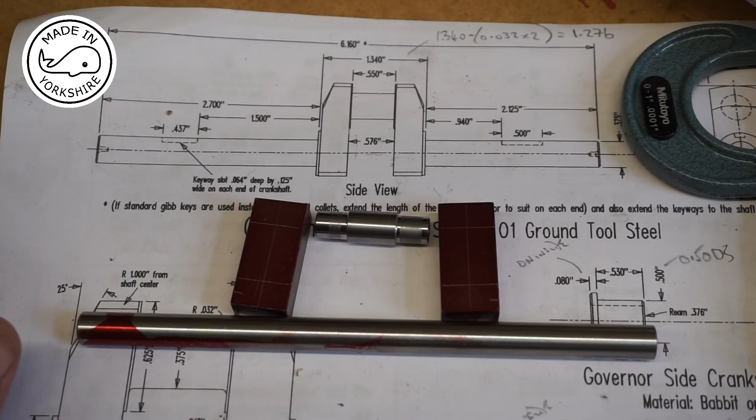Now in this video I'm going to be machining the crankshaft for the Farm Boy hit and miss engine. Okay, so the drawing shows the crankshaft being made out of one piece of tool steel. Now I've not a cat in hell's chance of making this out of one piece of metal, so what I'm going to do is fabricate it. I've got some silver steel rod here, which I think is the same as tool steel. This is 3/8 of an inch in diameter. So I'll show you what my plan is.

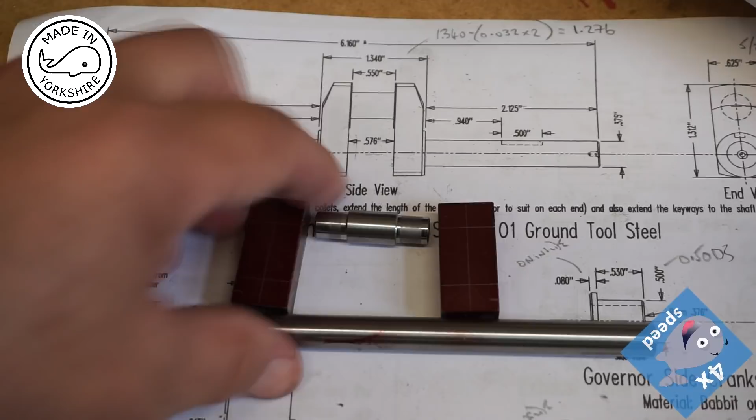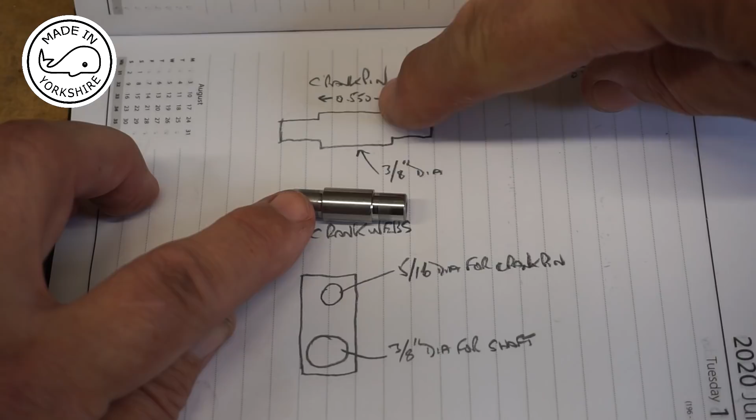For the crank web, I've already partially machined this, and what I've decided to do is to turn the sides down to 5/16 of an inch and leave the centre a width of 0.550 of an inch. So that actually means that when I assemble this, I can push these crank webs up to that point, and I'll be damn certain that the distance there is

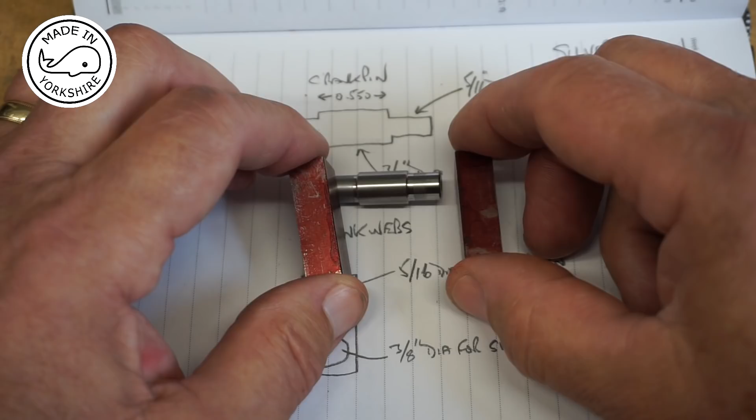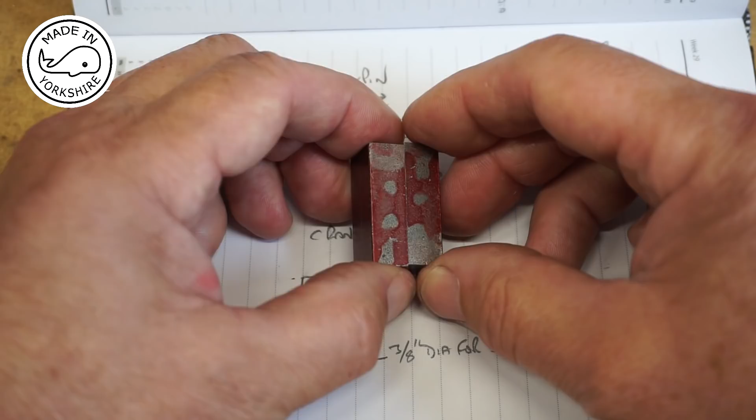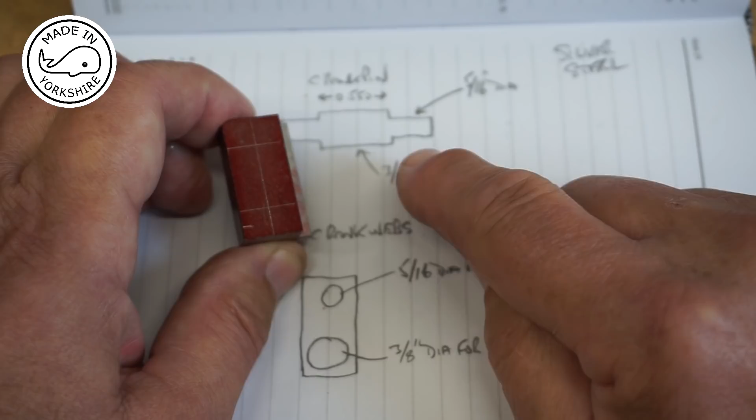0.550 of an inch. If I left these outside edges the same diameter as 3/8 of an inch, then on assembly it might be a bit more difficult. So that's my plan. With the crank webs, I'm going to Loctite these together, I think. The top hole, which I've marked, will be drilled and reamed to 5/16 of an inch, and the bottom one will be drilled and reamed to 3/8 of an inch. I think I'm going to do that on the milling machine, so I'll get it set up, and then I'll get back to you.

Okay, so I've already used an edge finder to find position, and I've used a centre drill, and that confirms that my original scribe lines were in fact correct. From now on, rather than use a normal chuck, I'm going to use an R8 collet chuck to give me more accuracy. This is a 6mm drill bit in there at the moment, and just to demonstrate how accurate that is, the gauge is just fluctuating around about 1 thou, so it's only 1 thou out, which is pretty good for a little machine like this.

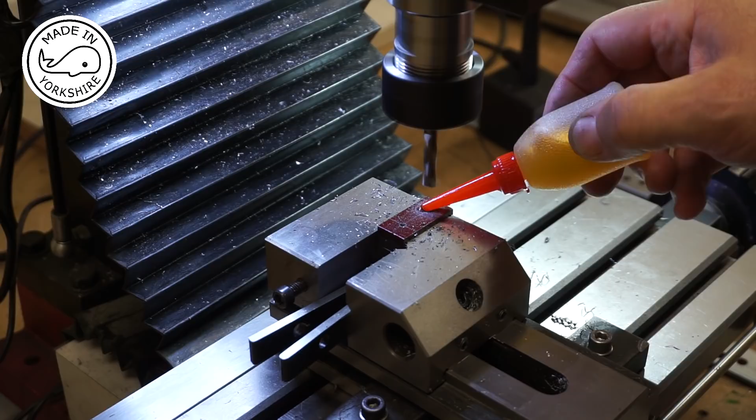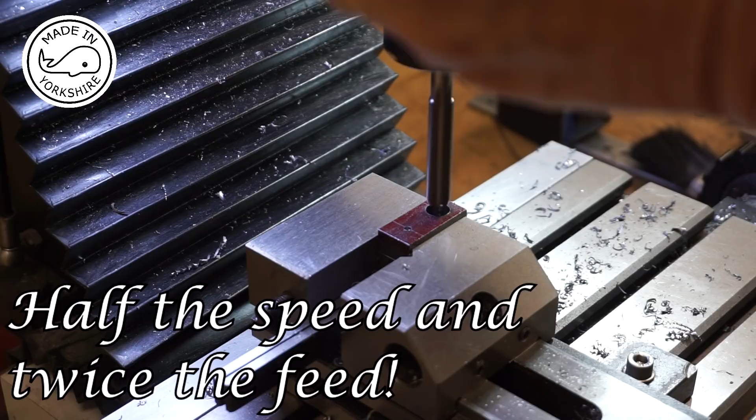So first of all I'll drill through with a 6mm drill bit, and on this one I'm going to drill to 23/64, and then ream to 3/8 of an inch. I've actually moved the reamer quite high up in this collet chuck to make it more accurate. Okay, so I need to repeat the same process for this other hole, but I'll open that up to 5/16 of an inch, and I'll do all that off camera. Well, that seems to have worked out okay.

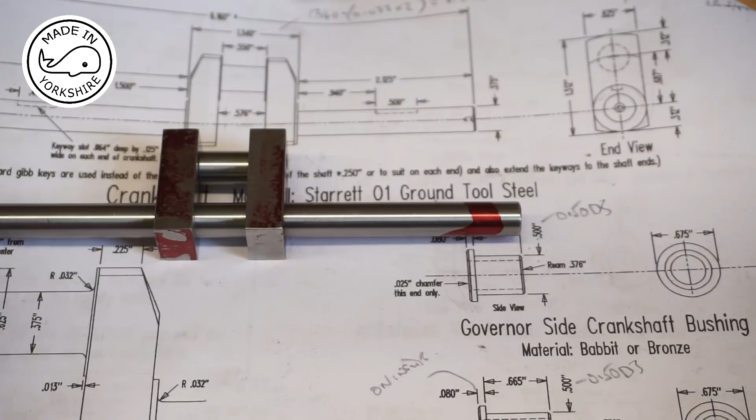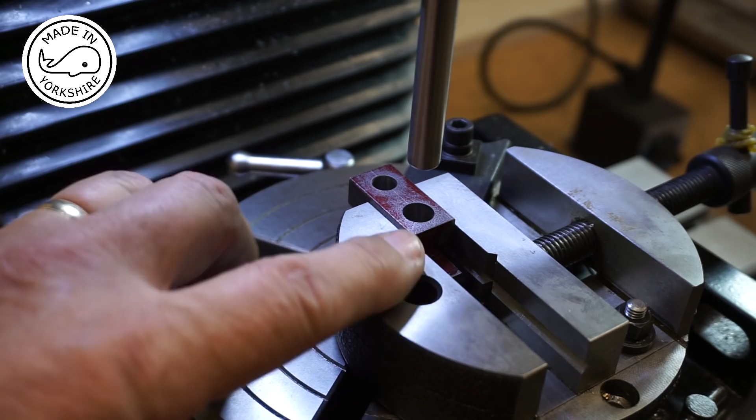What I need to do now with these crank webs is to create a boss there, and also put a radius on each end. To do that, I'll set up the rotary table on the milling machine. I've centred the table and put the piece in this little vise. This is a piece of rod 3/8 of an inch in diameter; I moved the rod into the hole, centred the vise, bolted it down, and now I know that this hole is spot on centre, on the same centre as the

rotary table. So to create this boss I need to put a cutter in here, position the edge just at the bottom, and take off 30-odd thou.

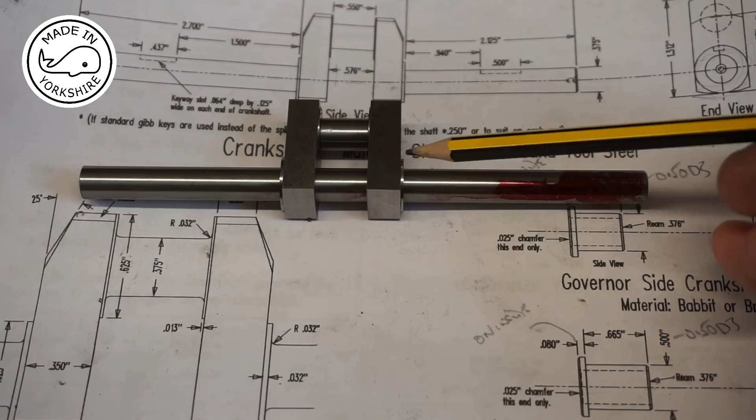Well, the crank webs certainly turned out okay by the looks of it. And I did realise when I looked at the drawing in some detail that there's a little boss on the inside there that needed to be machined. It's only 13 thou, but I did that in exactly the same way as I did the outside ones. So what I need to do now before I glue it all together is I need to cut these keyways. So I'll mark them up and then I'll go over to the mill and have a go at cutting them.

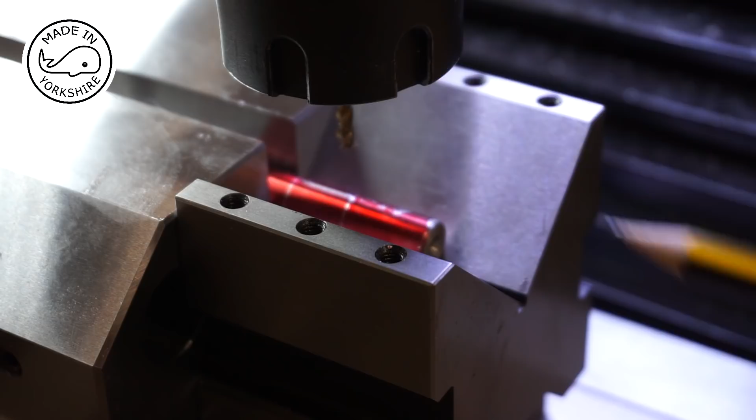Okay, so I've marked up the keyways and I've placed the shaft on these V-blocks between this Type 2 vise from Arc Euro Trade. This is a 90mm wide vise, which is a bit large for this milling machine, but it works out fine for this application.

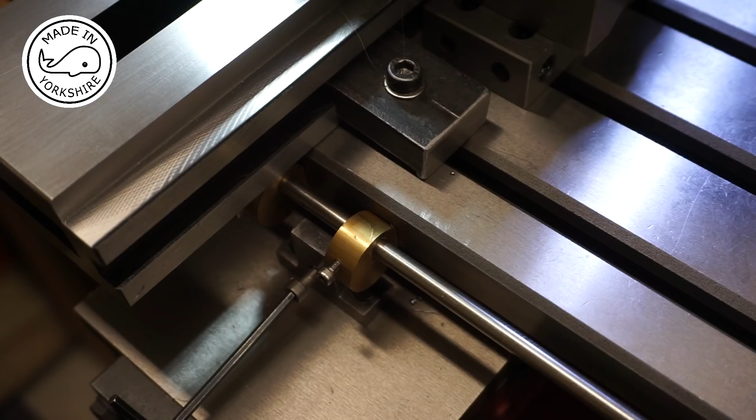Now, a while ago I made some limiters for the x-axis, and I don't know whether you can see it, but there's one in there and obviously one here, and they're limited in terms of the travel, so they're adjustable. You can move them wherever you want really, and I've set them so I can just go between the two stops, and that's exactly set where my marks are.

So rather than having to look at the DRO every time to see if I've come far enough down on the x-axis, I don't need to do that. I can just keep on going between these limits, and all I need to do is to start cutting at a depth of 1/1000 of an inch until I get to 64 thou. So that's the plan.

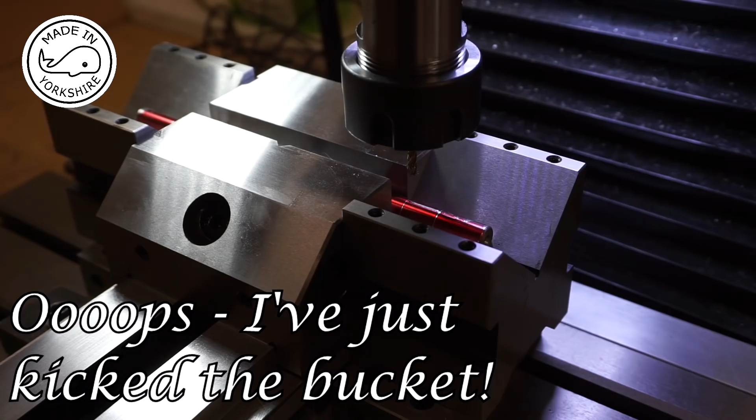Oops. There you go, I've broke the cutter. It just goes to show that 1/1000 at a time is too much for a little 3mm diameter cutter. Okay, so in hindsight I should have probably plunge cut with that 3mm end mill. But anyway, you live and learn. Now I've not got another 3mm end mill, so I'm going to have to send off for some.

So what I'm going to do now is I'm just going to use this 3mm, in fact it's 1/8 of an inch drill. So I'll drill to a depth of around about 64 thou, and then I'll move down a bit and repeat and carry on like that for the moment.

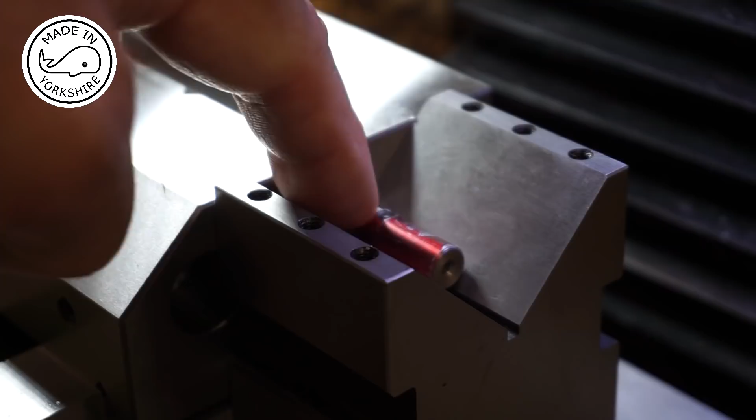Well, I'm certainly not happy with that. The drill bit wandered off slightly. So what I'm going to do is wait until I get another 3mm end mill, and when that arrives I'll use downward cuts instead of side cuts. Okay, so I had a bit of a rethink and I decided to use a little centre drill. So I've gone down the line with that. So when that 3mm end mill arrives, I should be able to tidy that up. So I'll repeat the same process on the other side, but I'll do it all off camera.

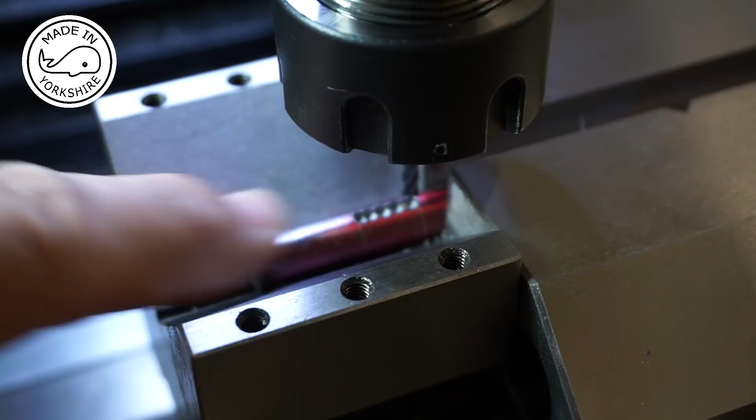Now, even though I've already centre drilled, I'm going to start off plunge cutting. Well, that looks pretty good. So what I'm going to do now is I'm going to cut sideways 1/1000 at a time until I get to that depth of 64 thou. But I'll do all that off camera.

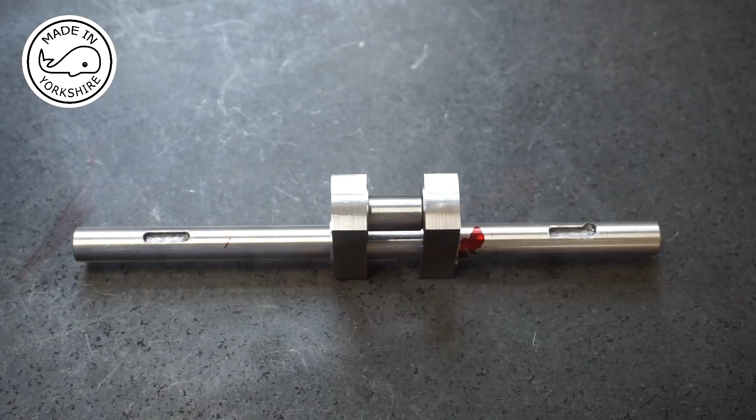Well, I never thought that milling a couple of slots would be so time consuming, but I got there in the end. Shame about that little mishap there, but never mind, it'll be under the flywheel.

So what I need to do now is, well, I've marked this end here, so I'm going to take it apart, then I'm going to use some Loctite 638, reassemble it again, and I'll have to do all that off camera because it's quite fiddly, and then I'll get back to you.

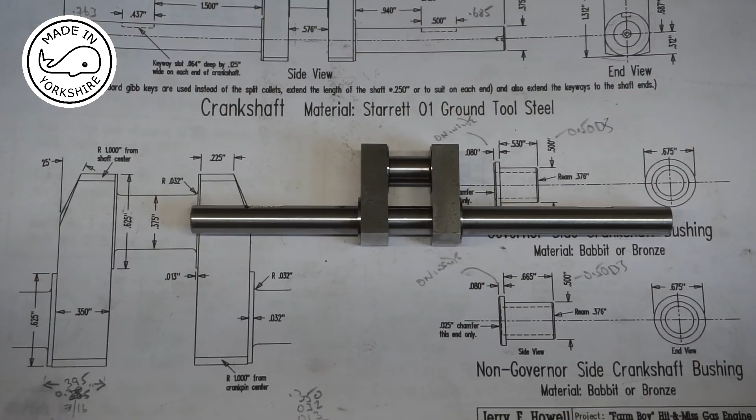Well, I could absolutely kick myself. When I assembled it, I didn't get the keyways exactly on the centre line of the crank webs. And I now realise that these keyways should have been machined after assembly, because I could have put that in the vise and then machined exactly in line. And I think with them being out, it could introduce some problems later on.

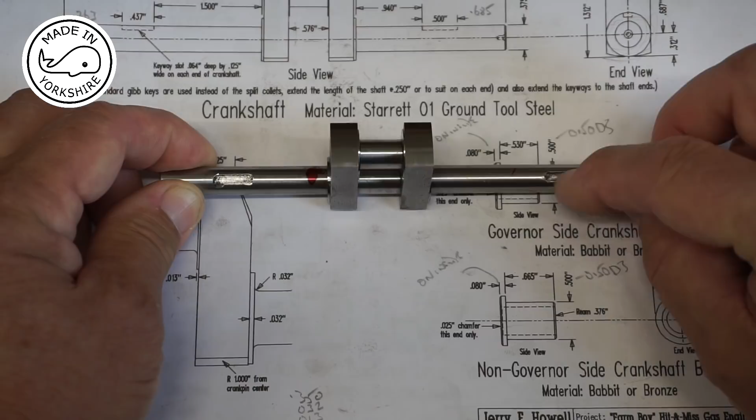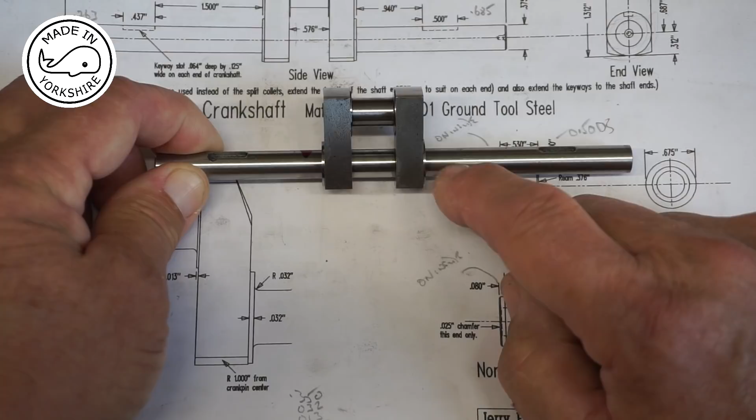So I think I've got two options here. I either try and recut some deeper ones, or I take it apart and put these incorrect keyways at the bottom and assemble it and then cut some more. And I think I'm going to go with that option. So the only drawback with that is I need to apply heat, and I do intend to actually pin these, so I'm not sure if applying heat is going to harden this. But anyway, that's my plan. I'll take it apart and try and recut them.

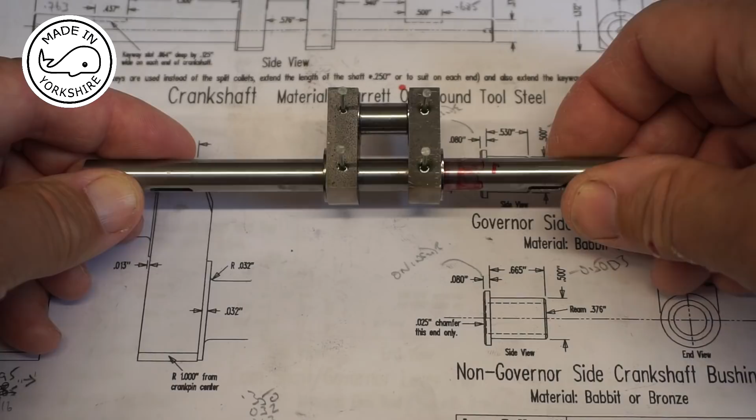Well, I managed to take it apart okay, using a bit of heat, and I've reassembled it using Loctite 638, and I've put the old keyways underneath here out of the way, so the new keyways will be cut up here. So after assembling it, I've put some pins in, and I'll snip these off and finish off with a file so they're not overly apparent.

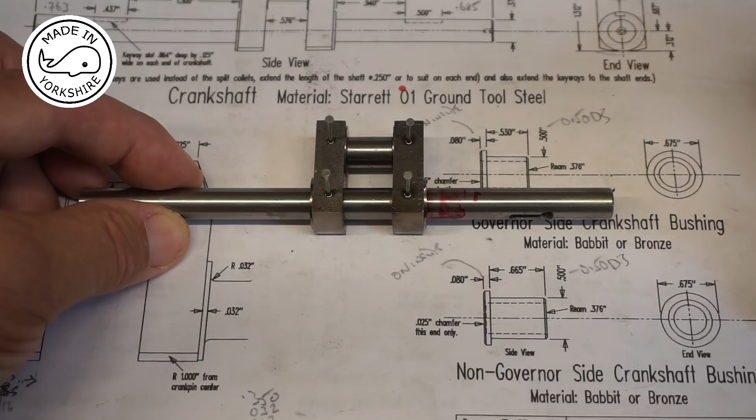And then what I'll do, before I cut the keyways, I'll cut this middle bit out with a hacksaw. Hopefully I'll get the right one and I won't cut this piece out, but who knows, anything could happen with me. So here I'm just cleaning up the inside faces.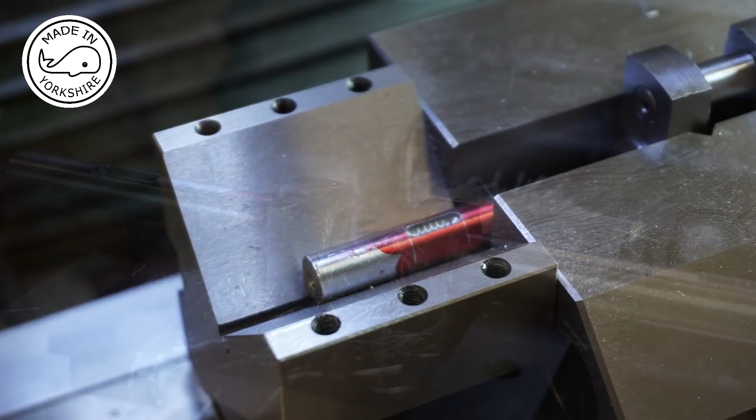Well, I've refined my technique for cutting these keyways. So having set the limits on the x-axis, I've then used a centre drill to drill to a depth of 64 thou, and I've moved the x-axis along 50 thou and then repeated and gone right along with the centre drill. Then I've replaced the centre drill with the 3mm end mill, and then I've followed exactly the same process but plunge cutting with it. I've not actually done that here yet.

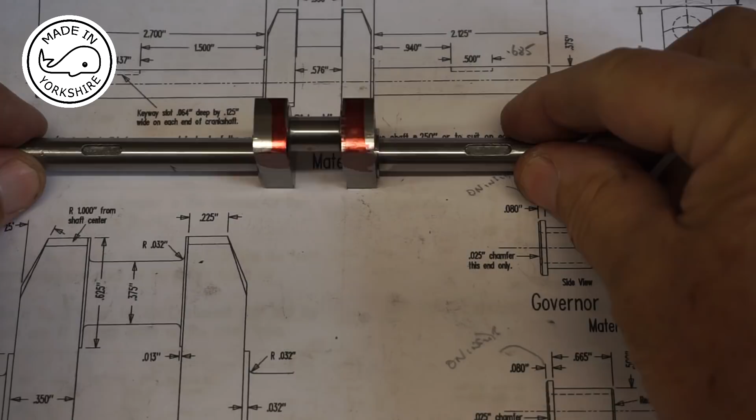And then once I've done that, I'm then going down 10 thou at a time, just across and back and across and back until I get to 64 thou, and that seems to get a really good result. Well, that turned out pretty well. Happy with that. And I think all I need to do now is to cut these angles here.

So I need to cut a 25-degree angle here. And the way I've set this up is I've used a sine bar. Now this is a 2-inch sine bar. So the sine of 25 degrees is 0.4226. Multiply that by 2 and you get 0.845 thereabouts. So what I've done is I've put some slip gauges under here, 0.845 of an inch, and that should give me an angle of 25 degrees.

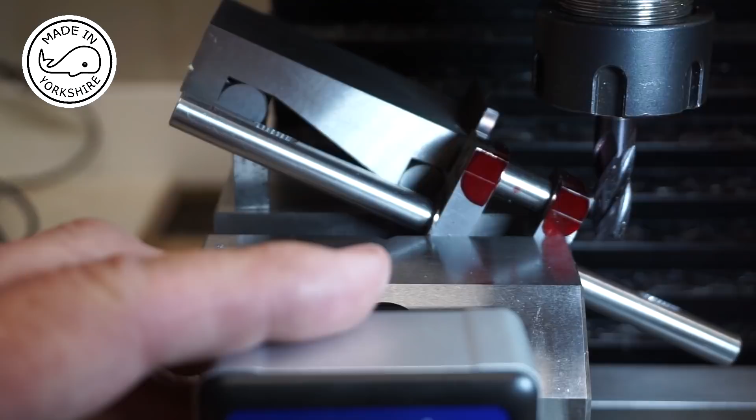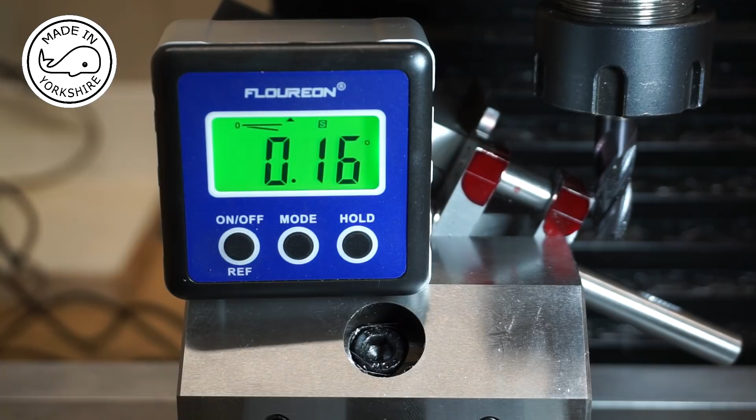Now just to double check that, I've got this cheap display thing, and that's calculating the current angle as 0.16. So in theory this should measure 25.16. Oops. .29. Well, I trust my sine bar as opposed to trusting that.

So if I take that off, and then I've just put this parallel on here, just to make sure that that edge is parallel with that, and it is. It's at the right angle, even though it might not look it on the camera. So having done that, it's just a matter of cutting this edge off here until I get to this line here.

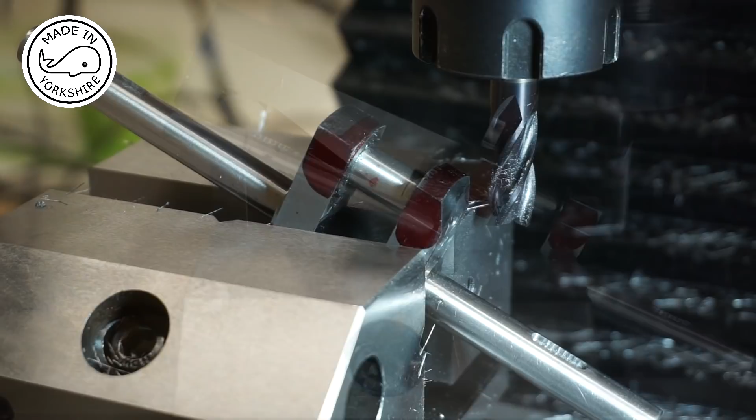Well, I'm cutting in tenth increments, so it's going to take a while, so I'll continue off camera and then I'll get back to you. Well, that turned out okay, so it's just a matter of switching it round and repeating the same process on the other side.

Well, that was certainly eventful, and I can't believe that I milled those keyways in the wrong sequence. But anyway, it was good practice doing them again. And it was also great messing around with that sine bar. I love stuff like that. But anyway, it seems to turn out okay.

I've had to take a few thou off the insides of the bearings for it to fit in, but it runs very freely. I mean, obviously I need to put some oilers in the top on assembly, but I'm very happy with the results so far.